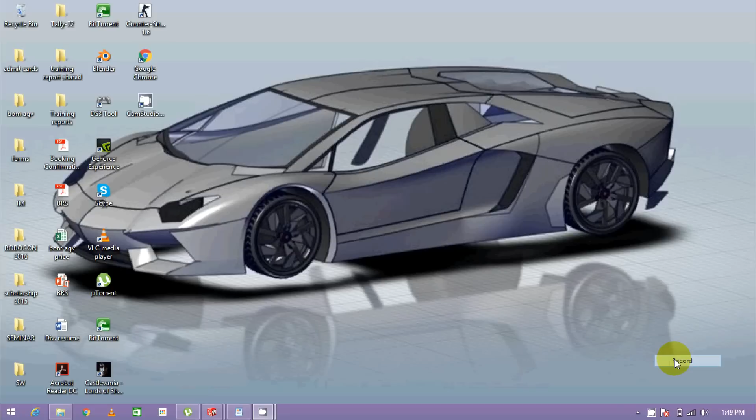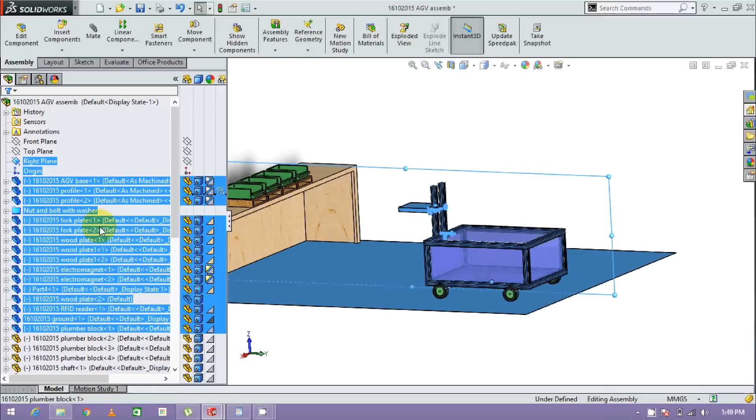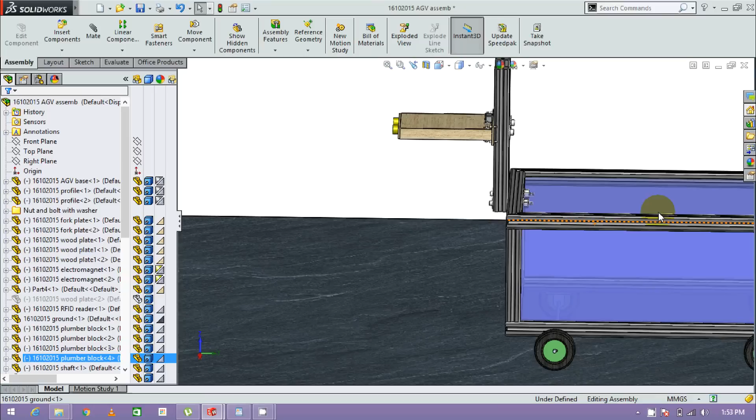The basic reason to create the CAD design was to make a proper model which can fulfill all the tasks and be easily manufactured, because with the software the dimensions and sizes can be achieved. So this model works as a reference. So here I take this ground as a reference, and I use aluminum profiles for the basic structure because it can be assembled easily.

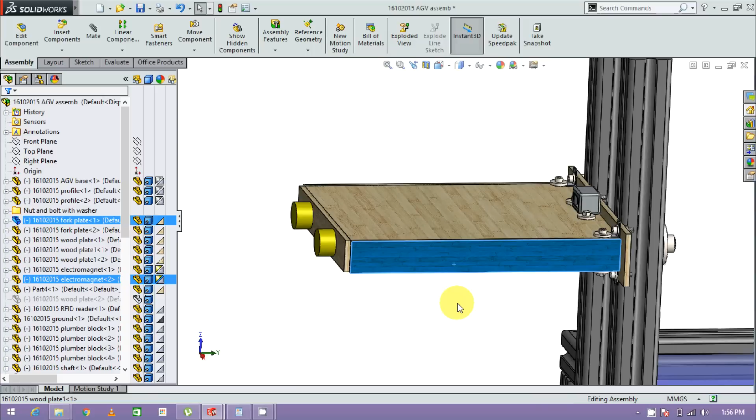Now you can see all the aluminum profiles here. And these are the aluminum angles which are basically used with these types of profiles to attach and detach. And for the ASRS, wooden sheets are used because these are cheap, easily available and lightweight. To make it very comfortable and easy, the electromagnets are attached to it.

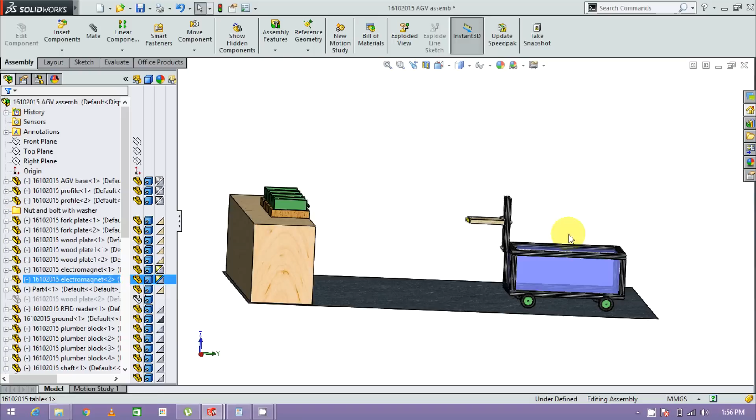So when the RFID reader gives a signal for the correct bin, it actuates the electromagnet and the bin gets stuck to the electromagnet. Here you can see the electromagnets which are fastened to the wooden fork. And for the motion transmission, mecanum wheels are used in the 4-linkage motion train because this type of train gives stability to the system. That's why a 4-linkage motion train is used here.

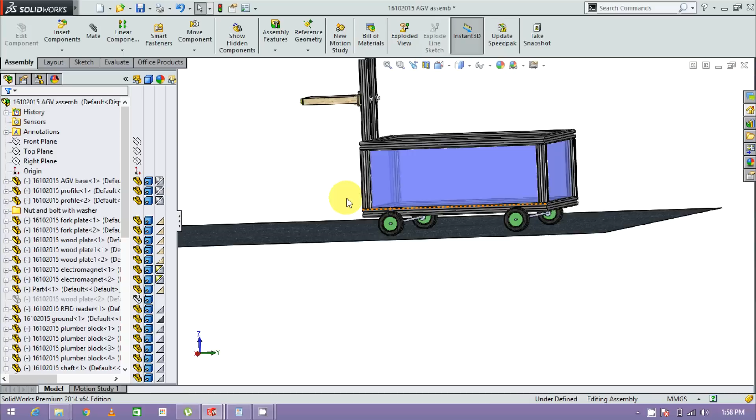Due to the movement in all directions, especially mecanum wheels are used. Basically these shown wheels are normal wheels because the design of the mecanum wheel is very difficult. So the wheels which are shown here work only as a reference.

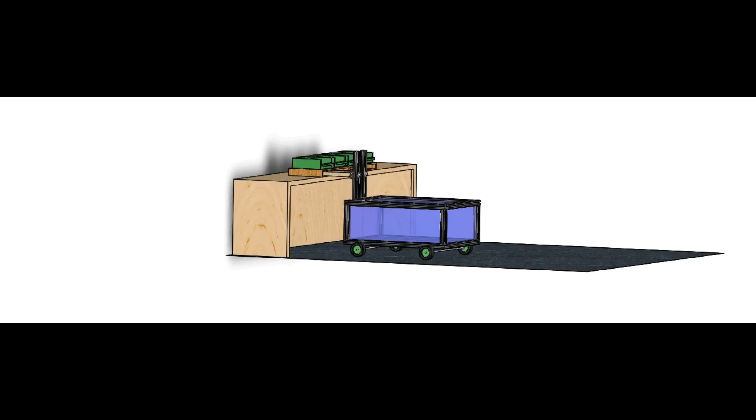So this is the animation of the ASRS. First our AGV moves towards the desired bin, and then the RFID reader gives the signal to the electromagnet to actuate it. And after that, the bin gets stuck to the electromagnet, and by this, the ASRS takes place.

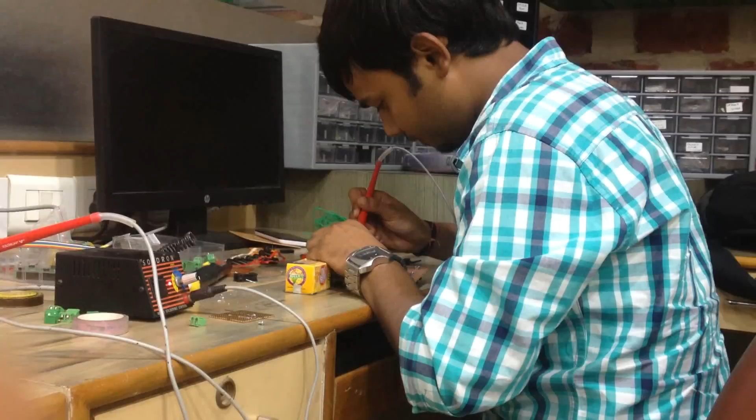Dealing with electronic circuits wasn't an easy task. The major challenge we faced was to design supplies for hardware components of various ratings and make the system as stable and safe as possible. In the beginning, the motor drivers behaved a bit ambiguously. It took a while to understand them fully.

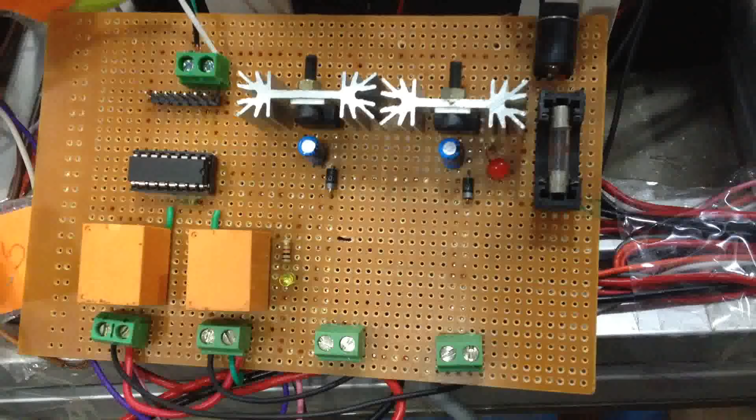Moreover, the output from the sensors also needed to be manipulated to logic 1 and 0 form. The first step in the electronic circuits is the power supply and the protection circuit. The power supply circuit has various voltage regulators and filter sections.

For protection from overcurrent, we have used fuses of appropriate values. Also, the reverse current from the motors was dangerous for delicate electronic components. For that, we have used flyback diodes.

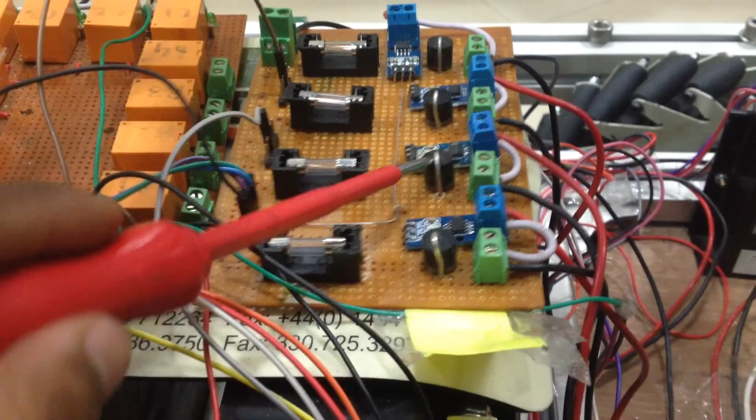This is our current monitoring setup. The setup has an ACS712 current monitoring module. The output from the sensors is processed in NI myRIO.

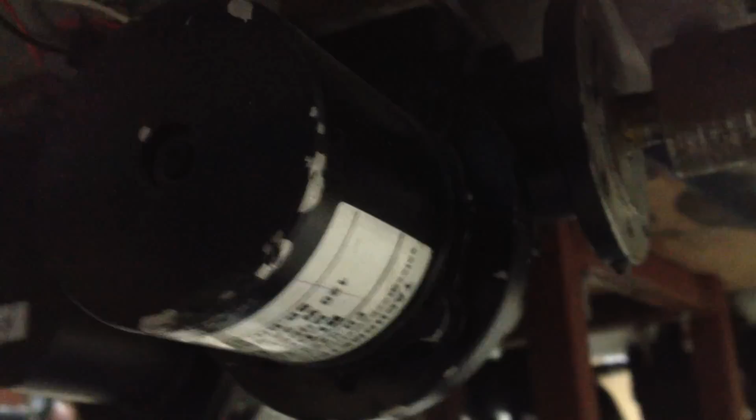These are our motors. We have used 12 Newton meter BLDC worm geared motors. The operating voltage across each phase of these motors is about 12 volts. We have used these motors because these are the only motors we could find in India having worm gears and appropriate torque.

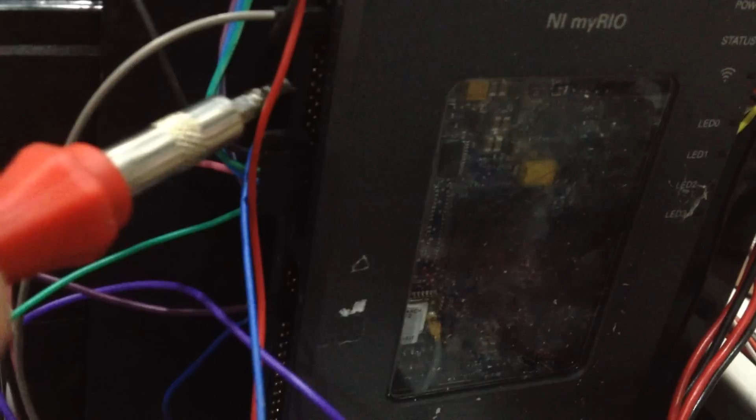This is our main processing unit, NI myRIO. We have used port A and port B for the PWM outputs for the motor drives. And we have used port C for logic input outputs, current sensor values and controlling the directions of motor.

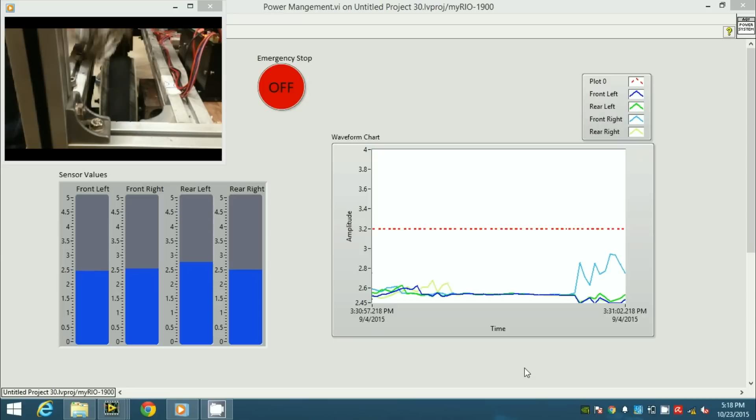From this video, I want to show the working of an ACS sensor. An ACS sensor is a device which measures the amount of current flowing through it using the concept of Hall effect to detect the magnitude of current. In the current video, we are showing you the single wheel motion without any load. Corresponding to the motion of the wheels, a chart is shown which displays the readings from the sensors of particular wheels. When we apply load to the wheels, the respective current sensor value goes high.

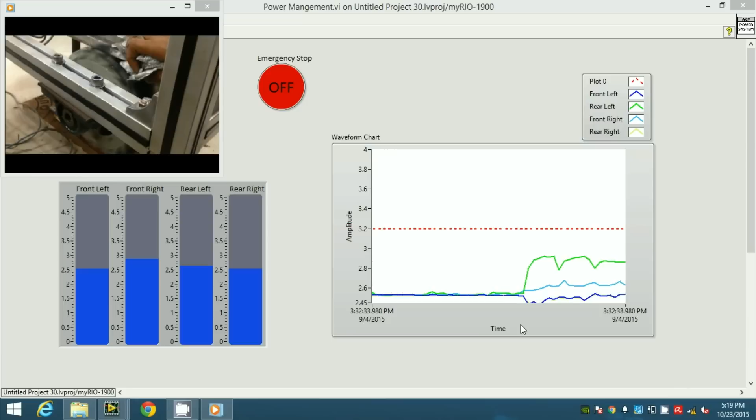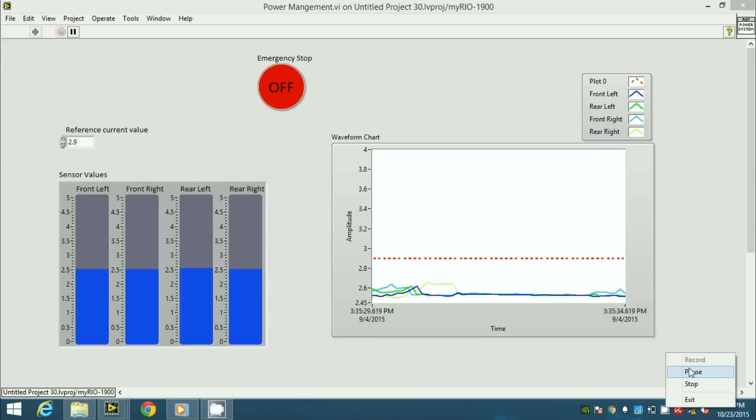Now as you can see, when we are applying force on the wheel, the current sensor value represented in green color goes high from its normal fluctuations. Notice that the reference current value, which was earlier 3.2, has been changed to 2.9, shown in the dotted red line. When any of the current sensor values crosses this limit, the system immediately shuts down.

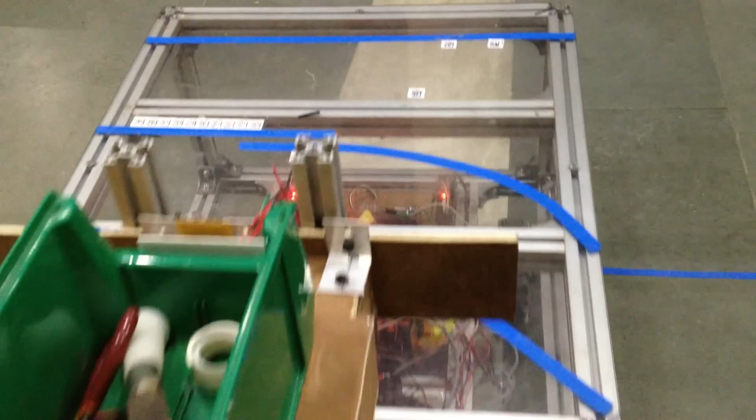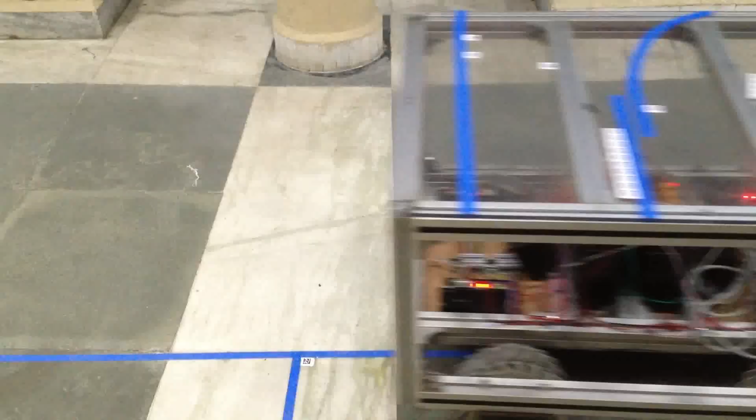RFID, or radio frequency identification, is the wireless use of electromagnetic fields to transfer data. We have used the RFID sensor to distinguish between different pallets. Our AGV communicates effortlessly via RFID tags to the pallets. It forms an indigenous system which guarantees that the AGV has detected the goods and faultlessly removes them from the shelf.

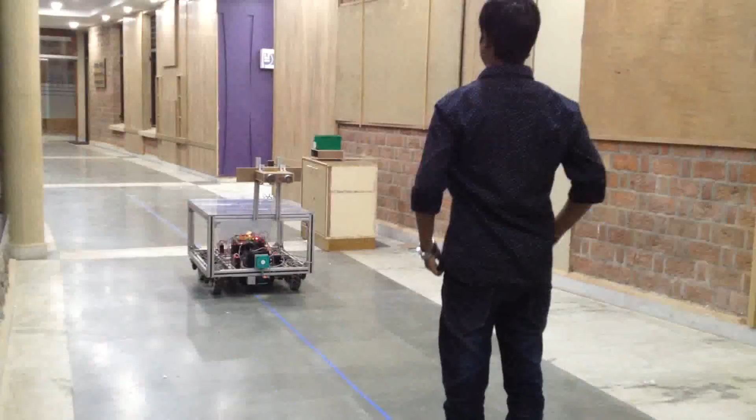This is our ultrasonic sensor from Pepperl+Fuchs used for obstacle detection. This sensor allows us to set two detectable ranges which can be teached manually, which correspond to A1 and A2 mode. It has a dead zone of 20 cm from the sensor in which it is unresponsive. We have teached A1 mode to 3 meters and A2 mode to 1 meter. So whenever an object comes in front of the AGV in 3 meter range, it starts to slow down, and when the distance becomes 1 meter or less, the AGV comes to a halt.

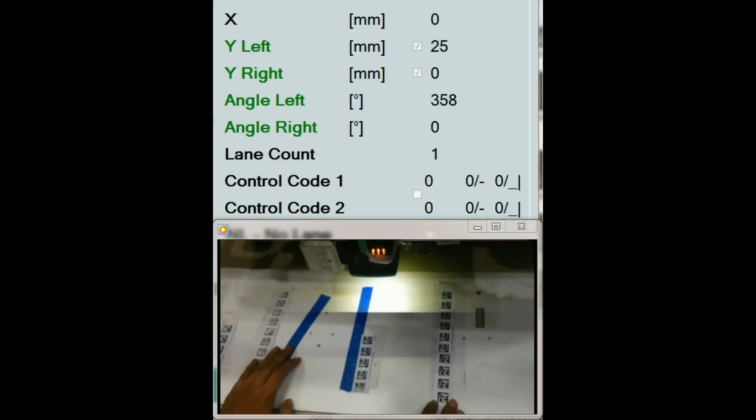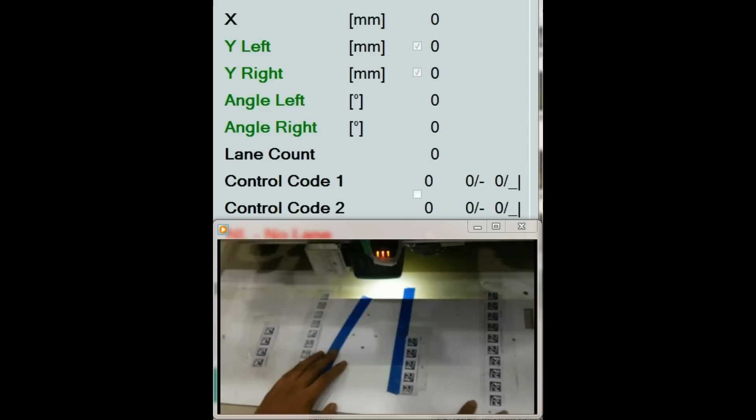This is our guiding system. This is a Data Matrix based position tracking system for automated guided vehicles. The PosiTrack PGV, or PGV, stands for Position Guided Vision. Traditionally, AGV control is accomplished typically by a magnetic segment or embedded magnets in the plant floor, or maybe an optical system with reflectors, or systems that use a contrasting tape or paint on the floor. These types of systems also require an RFID tag embedded in the floor to start and stop, or to initiate a turn, or to encode to jog an AGV forwards and backwards.

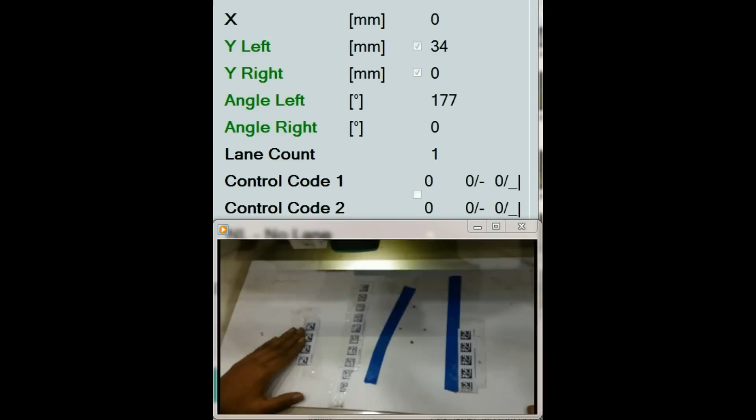The beauty of this PGV is that it combines three of these technologies in a single unit. You get your tracking, your positioning, your start and stop, or your initiation all in one product. It is a 2D scanner camera. This camera provides 0.2 mm of resolution and a view field of 120 mm. It has a standoff distance of 100 mm.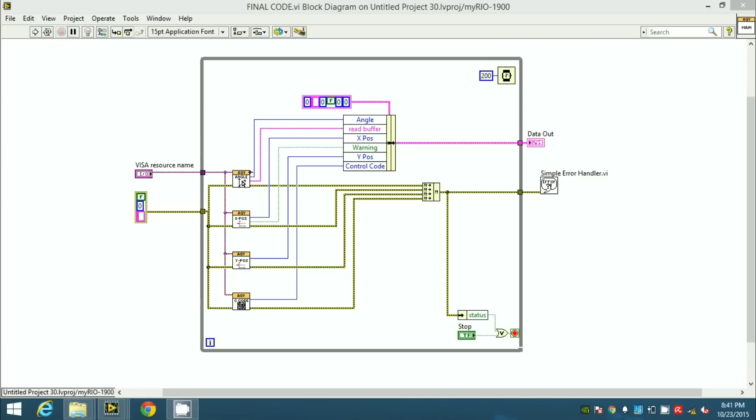This is the final PGV code block diagram. This code has been built strictly according to the NI style guidelines. Here is the final code that we have built for the PGV sensor interface and its data interpretation. We have extracted here all the relevant information which is needed to guide a vehicle.